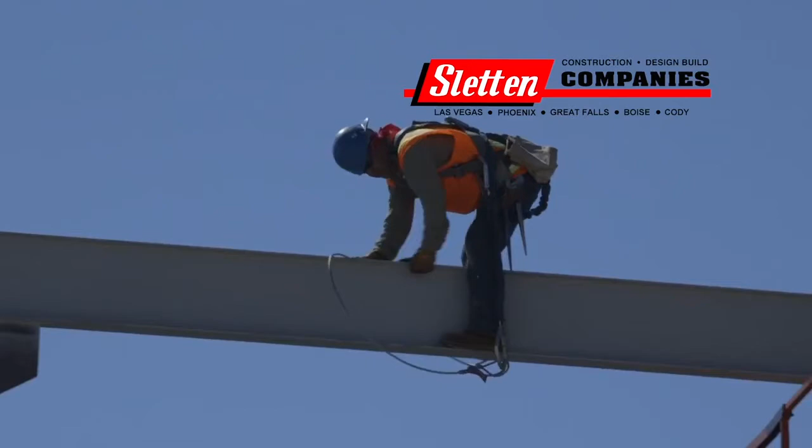It is also important that we have a constant and never wavering focus on improving safety, improving how we conduct our daily activities, eliminating risk, and improving daily safety and how we manage risk on the job. Rather than simply taking chances and ignoring unsafe conditions, we must pre-plan our work to help minimize the hazards and eliminate the risk of injury.

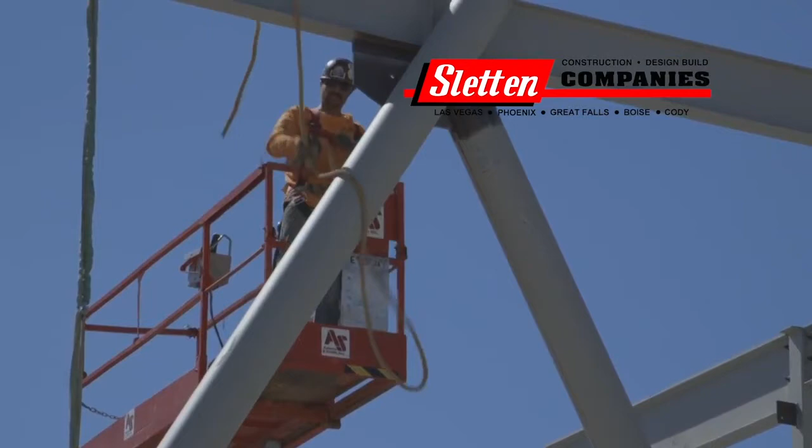Our mission statement and our company values also support this approach. Now is a particularly exciting time to join Sletten Construction. We are learning new ways to make the most of being part of a global economy in construction and its expertise and resources. And we have our own initiatives underway for transforming Sletten Construction into the engaging and dynamic company that we aspire to be, and a leader in safety in the construction industry.

We are proud of our employees and the excellent work they are doing. We are pleased and happy to welcome you to our company and look forward to your contributions to our success.

Thank you. My name is Jeremy Garness. I've been working for Sletten Construction in various areas since July 1997. I'm currently now in the Great Falls shop. I'm here to talk to you today about the decisions you make at work and how shortcuts can affect your family and your life.

On July 12, 2010, I took a shortcut at work and it left me burned on 65% of my body. They life-flighted me to Harborview Medical Center, where I spent 69 days, initially 59 in the ICU and 10 on the main floor, going through 11 different surgeries.

I was released on September 18, 2010. I went back to work part-time October 22nd, 2010, and was released to full duty on December 10th, 2010. I went through 3 other surgeries after my initial surgery, so I did a total of 14 surgeries, nearly 100 days in the hospital, and several years of rehab.

Safety goals for this project: 0 accidents, 0 injuries, and compliance with all OSHA regulations. We can accomplish this by working together as a team and not taking shortcuts.

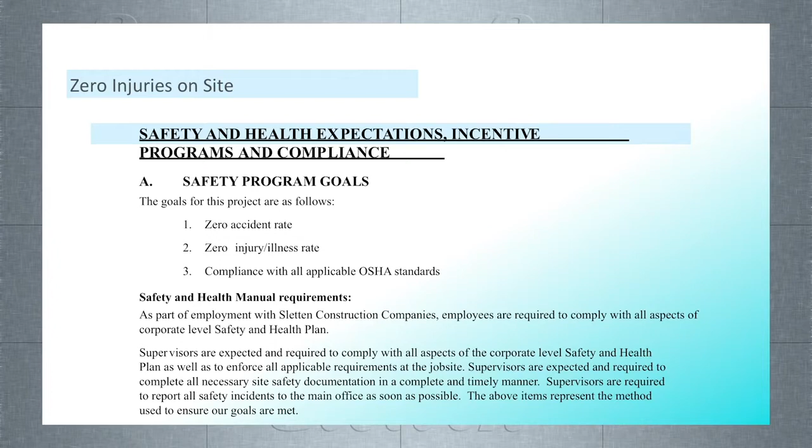What is a job hazard analysis? A job hazard analysis, also known as a JHA, and also called a Job Safety Analysis, or JSA, is a technique to identify the dangers of specific tasks in order to reduce the risk of injury to workers.

Why is a JHA important? Once you know what the hazards are, you can reduce or eliminate them before anyone gets hurt. The JHA can also be used to investigate accidents and to train workers how to do their job safely.

JHAs must be completed for all major tasks, including excavation, scaffolding, lockout-tagout, confined space, fall protection, framing, chipping, demo, concrete forming and concrete pours, and many others.

It will take a little time to do your JHAs, but it's time well spent. Be sure to involve employees in the process. They do the work and often know the best ways to work more safely.

Safety toolbox huddles are required daily and must be signed by all employees in attendance.

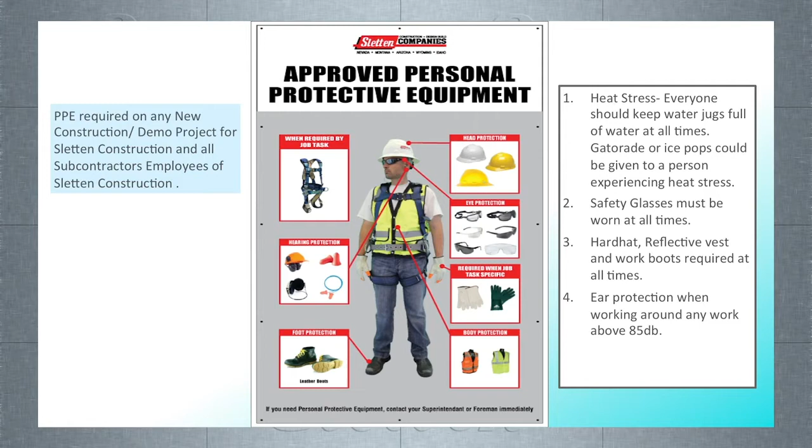PPE: The personal protection equipment required on all Sletten construction projects consists of safety glasses, reflective vest, hard hat, sleeved shirt, long pants, and boots. Hearing protection is to be worn whenever the noise level is above 85 decibels, and fall protection should be worn when working 6 feet above any level. Be sure to wear gloves when needed.

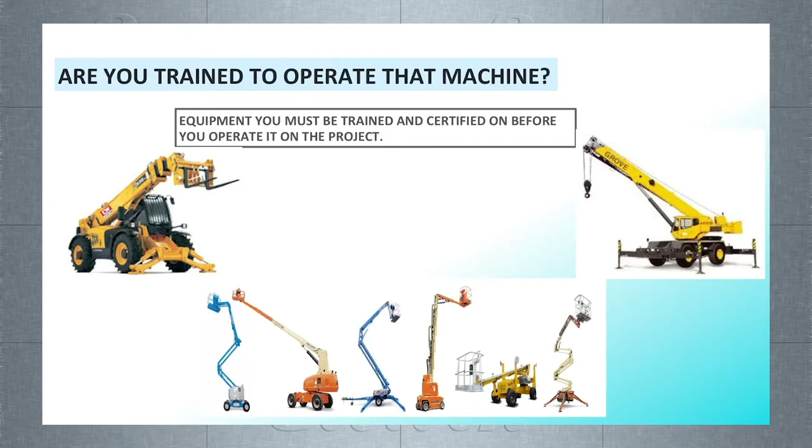Employees must be trained on equipment to be used on site, including forklifts, snorkel lifts, boom lifts, and cranes. Please make sure to have your proof of training on you at all times. All equipment being operated on site must have a daily documented inspection form available on the equipment.

Ladders: When accessing another level, the ladder must extend at least 3 feet above the landing to provide a handhold for getting on and off the ladder. The ladder must be secured at the top and the bottom. The ladder must be inspected prior to use, and if any defects are noted, the ladder must be taken out of service. When setting up an extension ladder, it should be set up at a 4-to-1 ratio.

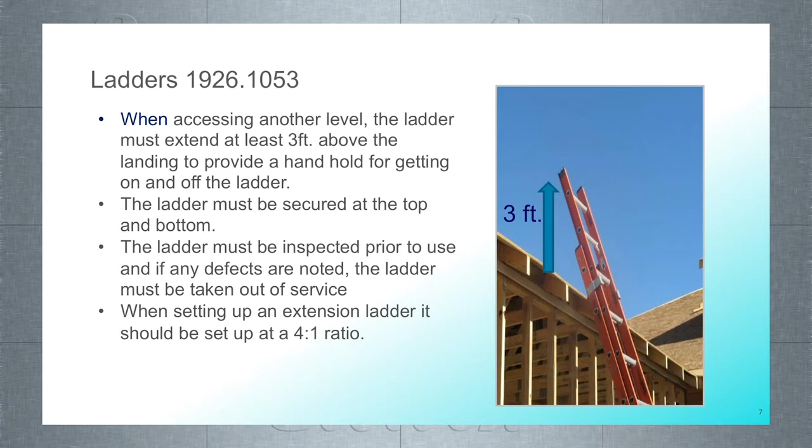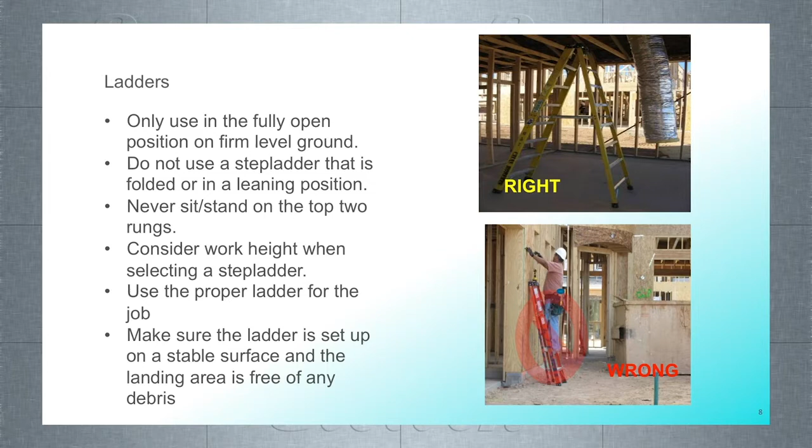Only use a ladder in the fully open position on firm, level ground. Do not use a stepladder that is folded or in a leaning position, and never sit or stand on the top 2 rungs. Consider work height when selecting a stepladder, and use the proper ladder for the job. Make sure the ladder is set up on a stable surface and the landing area is free of any debris.

Housekeeping: All work areas, walkways, stairways, access, and egress points shall be maintained to remain clean and free of debris and materials. Work areas shall be cleaned as often as necessary to eliminate trip, slip, and fall hazards. Focus areas include scaffolds, ladders, ramps, stairs, electrical and mechanical equipment.

Subcontractors are responsible for their own daily cleanup. Good housekeeping promotes a safe and productive work environment and is a critical element in the safe execution and completion of Sletten projects. Please throw your lunch away in a proper trash container. If you don't have a container, please ask for one.

Fall protection: The superintendent of each contractor on site shall oversee all aspects of the fall protection program on the job site. Every contractor on site whose employees are exposed to fall hazards shall have a competent person oversee all aspects of the fall protection PPE.

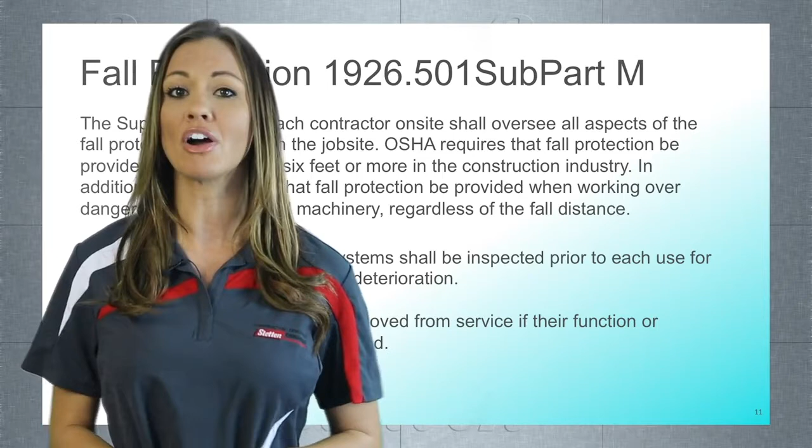OSHA requires that fall protection be provided at elevations of 6 feet or more in the construction industry. In addition, OSHA requires that fall protection be provided when working over dangerous equipment and machinery, regardless of the fall distance. Components of fall protection systems shall be inspected prior to each use for mildew, wear, damage, and other deterioration. Defective components shall be removed from service if their function or strength has been adversely affected.

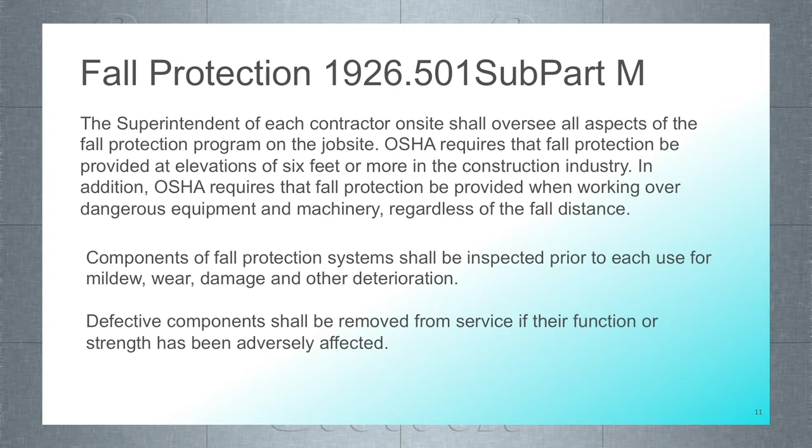Personal fall arrest systems will be mandatory for every person on this project when working at a height of 6 feet or more when no conventional fall protection is in place. A conventional fall protection system consists of a guardrail system with a top rail of 42 inches and a mid-rail of 21 inches. The guardrail system must be able to withstand a force of 200 pounds upward, inward, and outward.

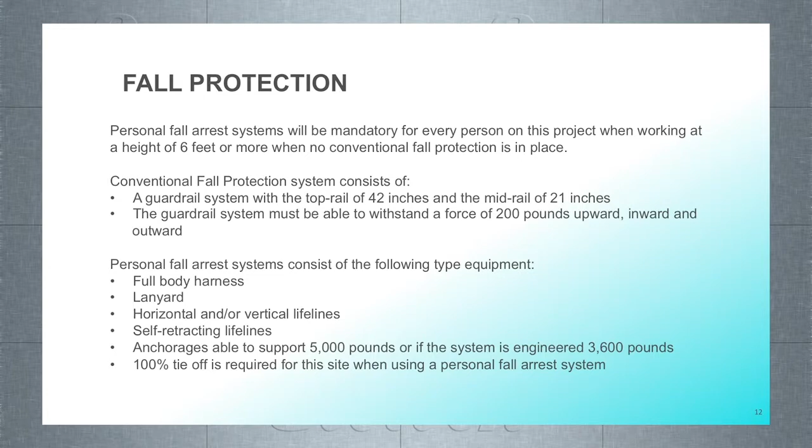Personal fall arrest systems consist of the following type of equipment: full body harness, lanyard, horizontal and/or vertical lifelines, self-retracting lifelines, anchorages able to support 5,000 pounds, or if the system is engineered, 3,600 pounds. 100% tie-off is required for the site when using a personal fall arrest system.

Each contractor on site that has employees working in an excavation shall have a designated competent person on the job site. The competent person shall be on site at all times during which excavation activities are conducted. All excavations over 5 feet deep shall be shored, sloped, or benched as required. Excavations 4 feet in depth or greater shall have a stairway, ladder, ramp, or other safe means of egress within 25 feet of any employee.

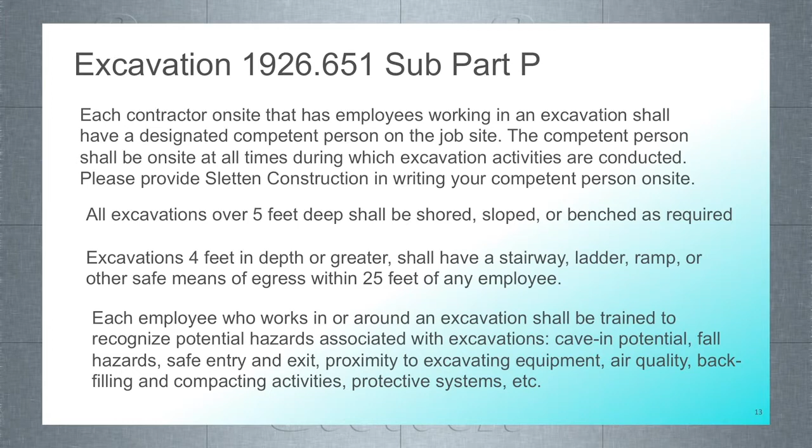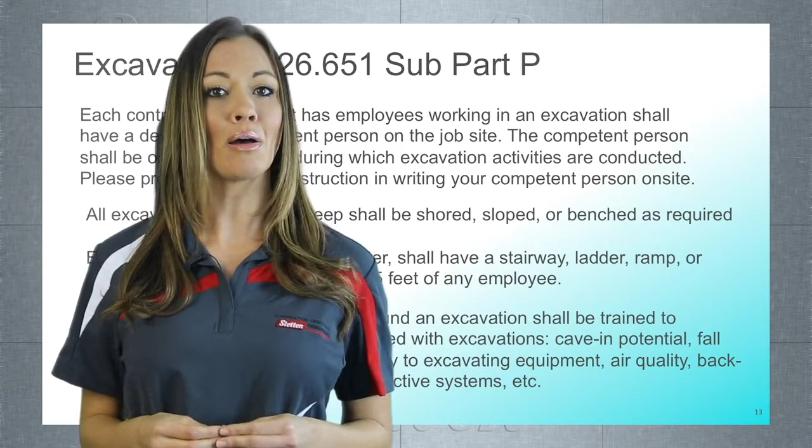Each employee who works in or around an excavation shall be trained to recognize potential hazards associated with excavations, such as cave-in potential, fall hazards, safe entry and exit, proximity to excavating equipment, air quality, backfilling and compacting activities, protective systems, etc.

What is the difference between an excavation and a trench? OSHA defines an excavation as any man-made cut, cavity, trench, or depression in the Earth's surface formed by earth removal. This can include excavations for anything from cellars to highways.

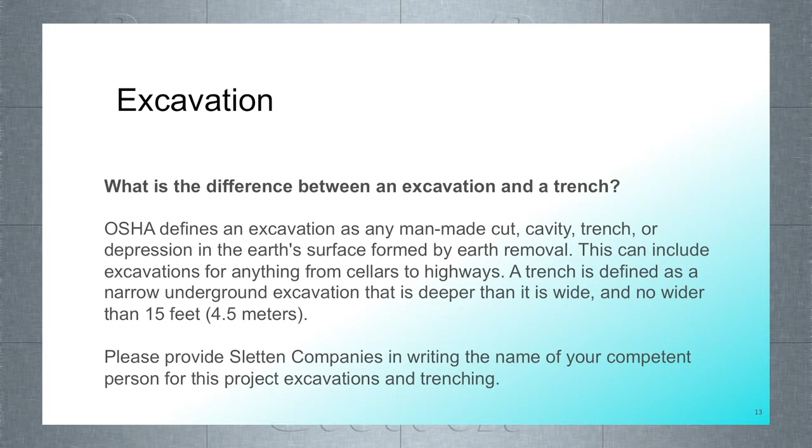A trench is defined as a narrow, underground excavation that is deeper than it is wide and no wider than 15 feet.

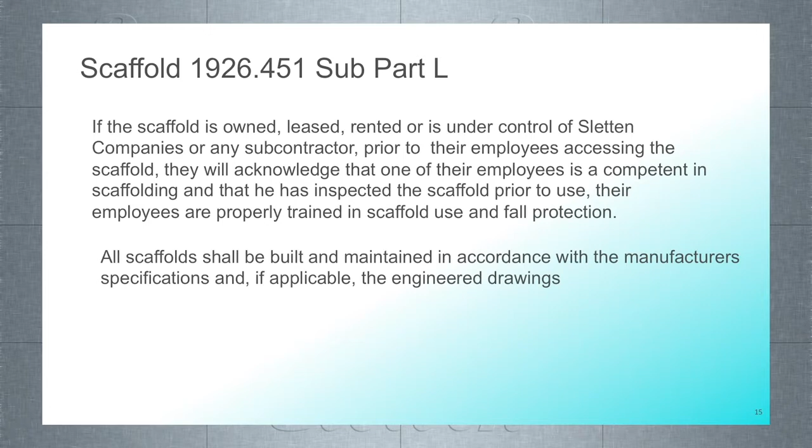Scaffolds. If the scaffold is owned, leased, rented, or under control of Sletten companies or any subcontractor, prior to their employees accessing the scaffold, they will acknowledge that one of their employees is competent in scaffolding and has inspected the scaffold prior to use, and that their employees are properly trained in scaffold use and fall protection. All scaffolds shall be built and maintained in accordance with the manufacturer's specifications and, if applicable, the engineered drawings. OSHA's scaffolding standard has several key provisions.

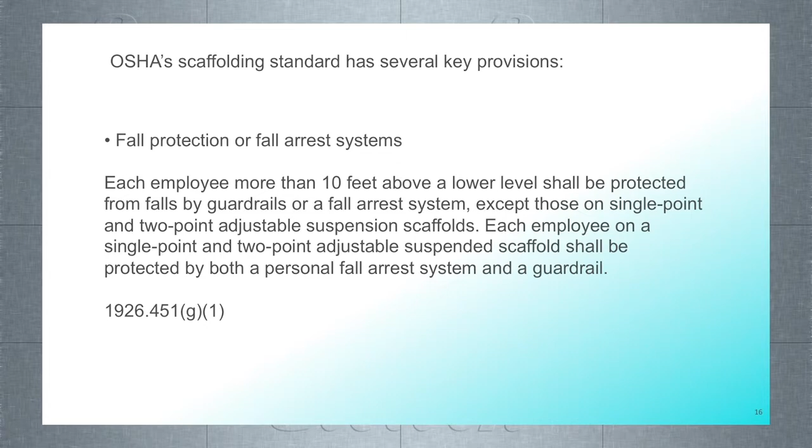Fall protection or fall arrest systems. Each employee more than 10 feet above a lower level shall be protected from falls by guardrails or a fall arrest system, except those on single-point and two-point adjustable suspension scaffolds. Each employee on a single-point and two-point adjustable suspension scaffold shall be protected by both a personal fall arrest system and a guardrail system.

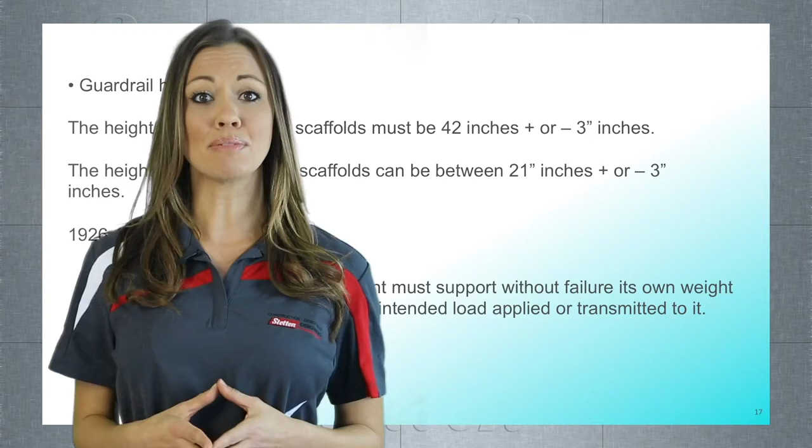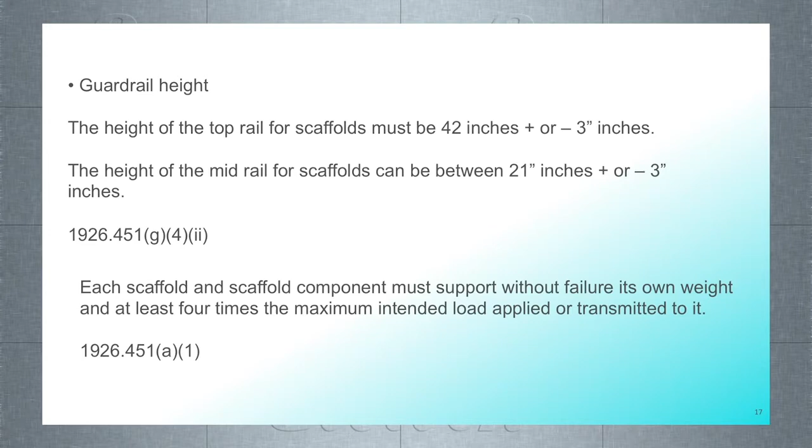Guardrail height. The height of the top rail for scaffolds is 42 inches plus or minus 3 inches. The height of the mid-rail for scaffolds can be between 21 inches plus or minus 3 inches. Each scaffold and scaffold component must support without failure its own weight and at least 4 times the maximum intended load applied or transmitted to it.

Lockout, tagout, and confined space. When a specific task being performed by any employee on the job site requires performing lockout, tagout, or confined space work, a job site JHA must be filled out by the contractor performing the work before any work starts. Each employee engaged in the work must have the proper training to perform the task safely and correctly. If you encounter either of these situations and you are not trained, you must stop work immediately.

The site shall comply with the Individual Emergency Action Plan, also known as EAP, for direction of emergency transportation. Please see each site's individual plan for evacuation. In the event of a medical emergency requiring medical response, immediately call 911 or the site's designated emergency response number and clearly give your name, location, and the nature of the incident. Stay on the line until the operator releases you.

Working above water. Employees working over or near water shall be provided with a U.S. Coast Guard approved life jacket or buoyant work vest when the danger of drowning exists. If the deck of a bridge or a work platform is not equipped with an OSHA compliant railing system, or if 100% fall protection is not provided, employees walking or working on the deck must wear a U.S. Coast Guard approved life jacket or buoyant work vest, also called a life preserver or personal flotation device, a PFD.

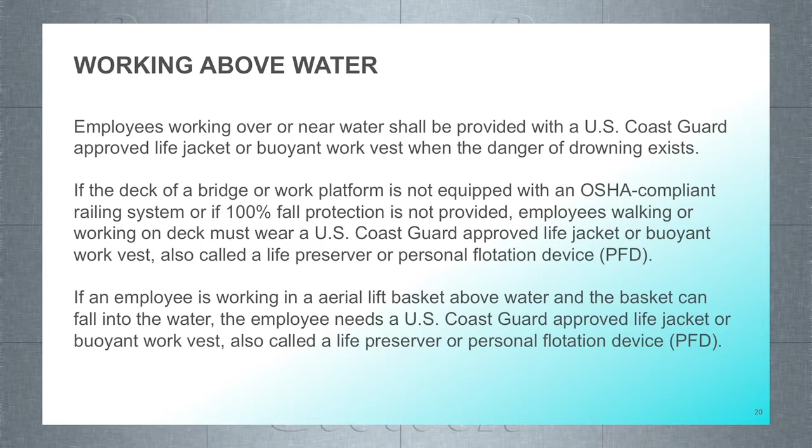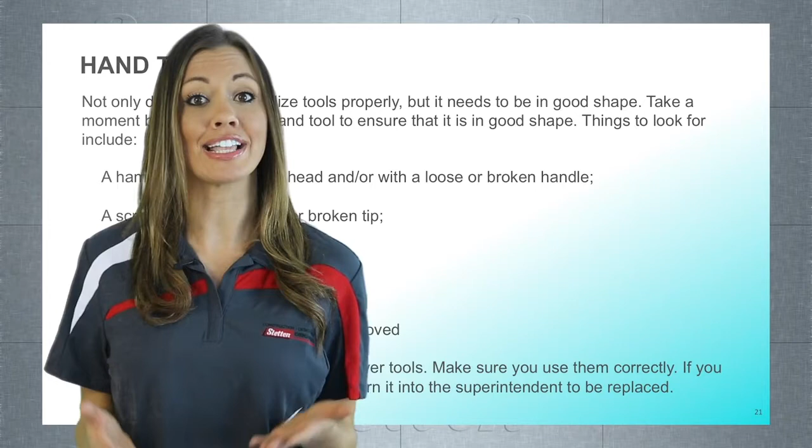Hand tools. Not only do you need to utilize hand tools properly, but the tool needs to be in good shape. Take a moment before using any hand tool to ensure that it is in good shape. Things to look for include a hammer with a chipped head and/or a loose or broken handle, a screwdriver with a worn or broken tip, any cutting tool with a dull surface, chisels with a mushroomed head, and tools that have had their temper removed.

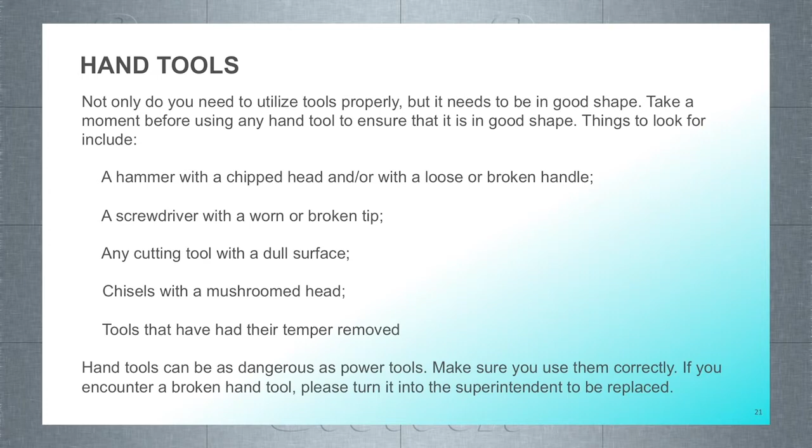Hand tools can be as dangerous as power tools. Make sure you use them correctly. If you encounter a broken hand tool, please turn it in to the superintendent to be replaced.

Focus on safety. Preventing the top 4 construction fatalities: 1. Fall hazards. 2. Electrical hazards. 3. Struck-by hazards. And 4. Caught-in-between hazards.

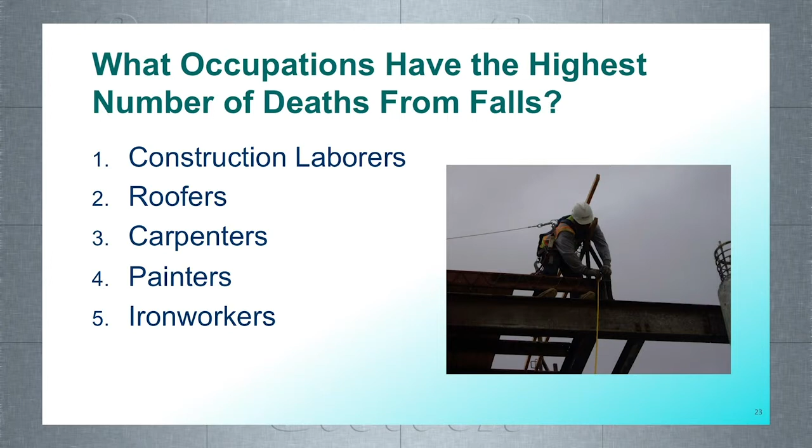What occupations have the highest number of deaths from falls? Construction laborers, roofers, carpenters, painters, and iron workers. Falls are number 1 - the leading cause of construction fatalities, accounting for 35% of construction deaths nationwide.

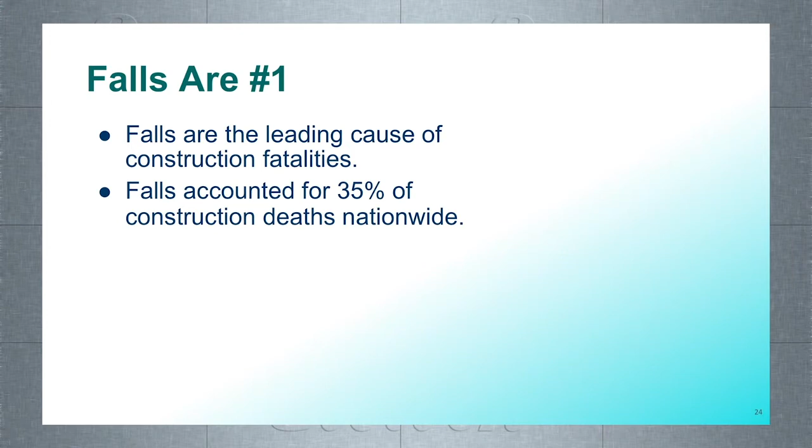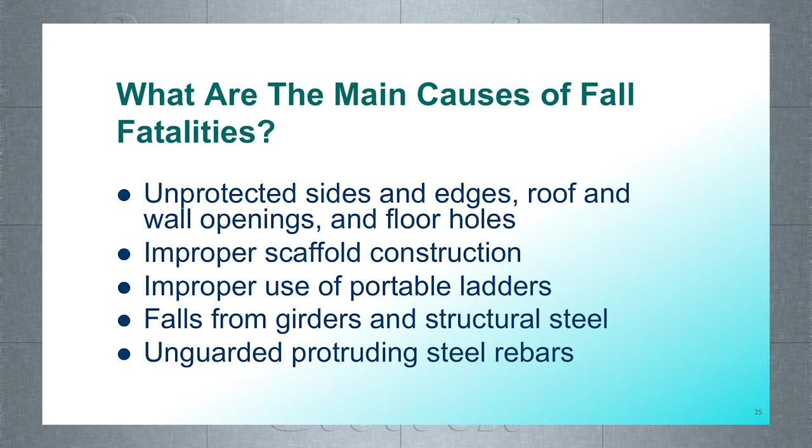Electrical hazards are number 2. Electrocutions are the second leading cause of construction fatalities, accounting for 10% of construction deaths nationwide in 2010. Workers can even be killed by ordinary household current.

What are the main causes of electrical injuries? Contact with overhead power lines, contact with live circuits, poorly maintained power cords, and improper use of power tools.

How can you work around overhead power lines safely? Locate overhead lines before starting the job. Keep equipment at least 10 feet away. Assume that the power lines are energized. De-energize and ground the lines when working nearby. Use wood or fiberglass ladders near power lines, still keeping at least 10 feet away.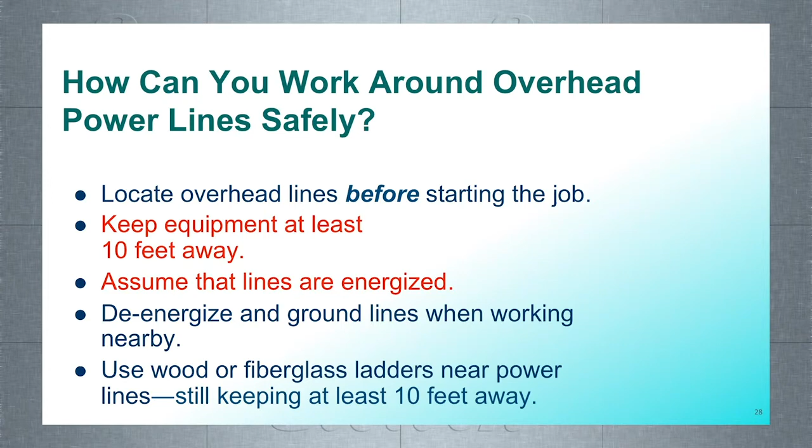Struck-by hazards are the second leading cause of construction fatalities, accounting for 8% of construction deaths nationwide. Approximately 75% of struck-by fatalities involve heavy equipment. One in four struck-by-vehicle deaths involve construction workers, more than any other occupation.

What are the main causes of struck-by deaths? Vehicle and roadway hazards, falling objects, and flying objects.

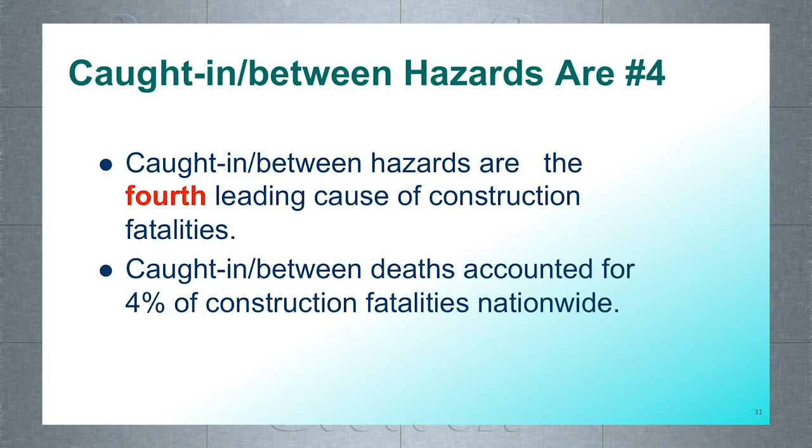Caught-in-between hazards are the fourth leading cause of construction fatalities, accounting for 4% of construction fatalities nationwide.

What are the main causes of caught-in-between deaths? Being crushed by collapsing materials, such as in a trench or excavation, and being caught in between machinery and equipment.

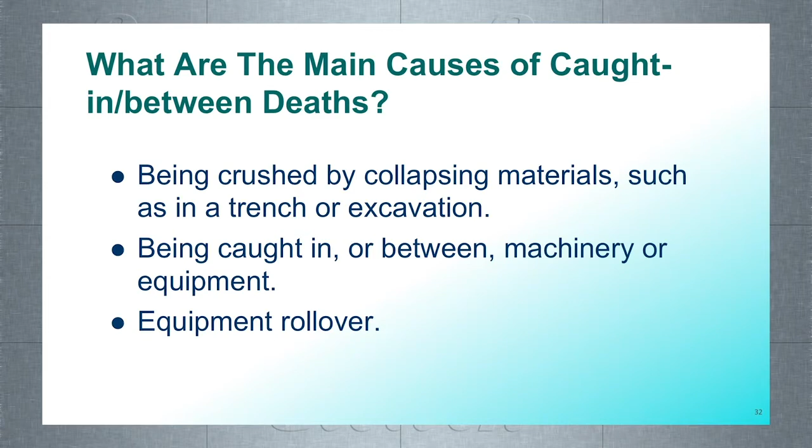Equipment rollover. Stop work. Who has the authority? Stop work authority: stand up for safety. Do it safely or not at all. Who has stop work authority?

What are the hazards? What workers are involved? Are you trained? Will you stop unsafe work? Is there a contingency plan? These are questions that you should ask yourself.

Historically, Sletten Construction has always supported the philosophy of stand up for safety, stop the job, and/or stop work authority. Ensuring personnel feel empowered, we will continue our stop-the-job focus and embed this message with all of our employees. Stand up for safety.

What are the hazards? Are they flammable? Are they falls, or gases, corrosives, or electricity? Are the hazards cave-ins or harmful dust, etc.?

Who are the right people involved? Do all the workers know the job? Are all equipment and tools in proper working order? Have you had the proper training? Are you trained on the specific equipment and/or tools required? How long has it been since you were trained?

What can we do differently? If in doubt, stop the job. Plan ahead for the task. Develop a job hazard analysis and, where required, personal protective equipment.

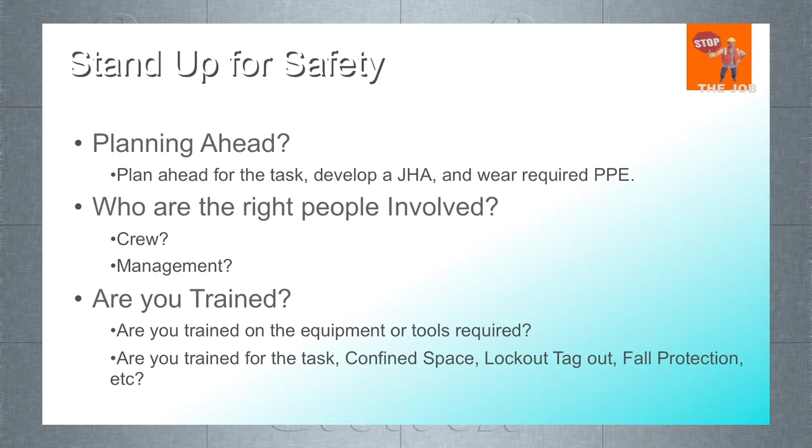Who are the right people involved? Is this the right crew? Do we have the correct management for the job? Are you trained for the specific task? Are you trained on the equipment or tools required, such as confined space, lockout/tagout, or fall protection?

Questions to ask: Will you stop unsafe work? Are you sure it is safe to begin work? What surrounding work may impact your safety? Did something unforeseen happen after starting the job? Do you have a contingency plan?

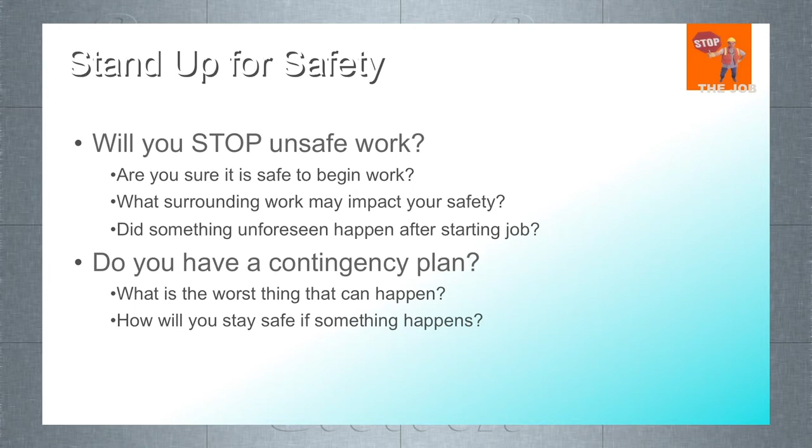What is the worst thing that can happen? How will you stay safe if something happens? You have the authority and obligation to stop the job until you are satisfied it is safe to proceed.

Global harmonization: new label elements and safety data sheets, or SDS. Label format. Description of pictograms: the health hazard pictogram.

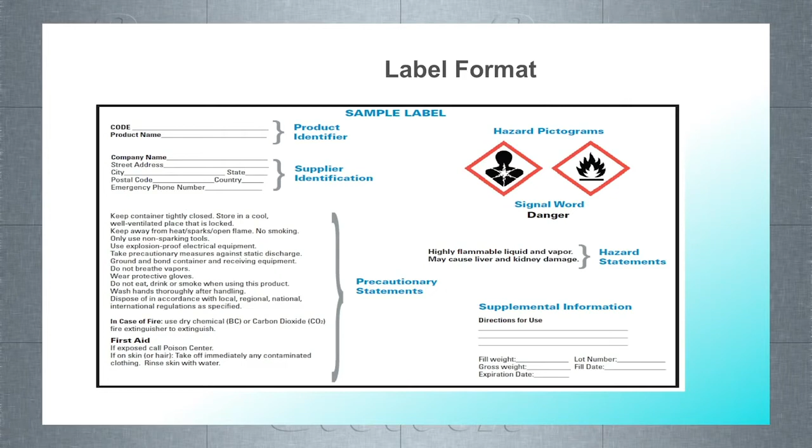Health hazard chemicals pose a risk to your health if used improperly. The skull and crossbones pictogram will usually be used in combination with a health hazard pictogram to signify particularly hazardous chemicals, such as chemicals with acute toxicity—fatal or toxic—which produce adverse effects following a single dose of the substance.

The exclamation mark pictogram will usually be used in combination with a health hazard pictogram to signify particular health risks, which are less severe than the skull and crossbones category.

The flame pictogram indicates there is a fire risk, and you should be especially concerned about ignition sources and combustible materials. Chemicals labeled with a flame-over-circle pictogram can create an increased fire risk in your work or storage environment.

Oxidizers are chemicals that produce additional oxygen in an environment, which may cause or contribute to the combustion of other materials.

Corrosion pictogram. The corrosion label should prompt you to be especially aware of PPE and storage requirements. Exploding bomb pictogram. Chemicals marked with an exploding bomb pose a significant physical risk and should be treated with extreme caution. The gas cylinder pictogram is used to identify compressed, liquefied, and dissolved gases. Understand the hazards of high pressures and how to use and store cylinders. The environment pictogram is a non-mandatory category for safety training because it is regulated by other agencies, but it is included here for your information.

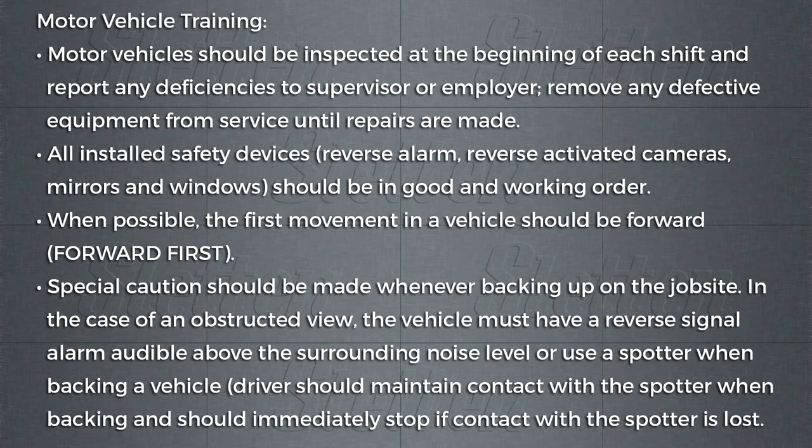Worker on-foot training. Be aware of equipment travel paths and avoid standing or walking in these areas. Be aware of vehicle blind areas and avoid being near these areas. Listen for reverse signal alarms in the area. Stay vigilant.

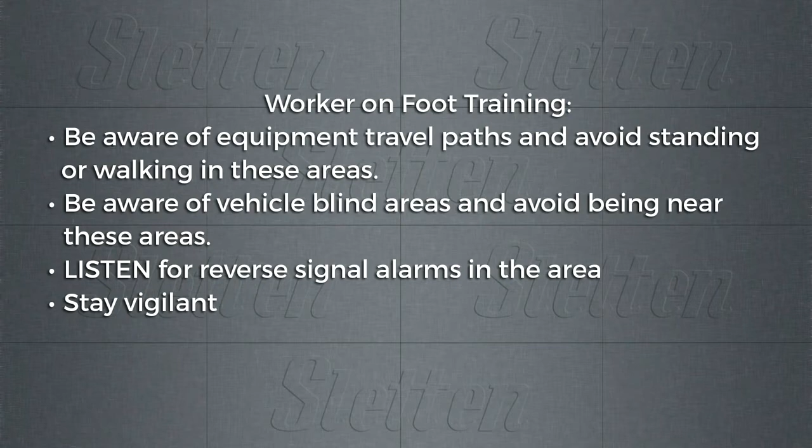Section 15, Regulatory Information, identifies the safety, health, and environmental regulations specific for the product that is not indicated anywhere else on the safety data sheet. Section 16, Other Information, includes the date of preparation or last revision.

Site emergency reporting, an emergency action plan, and accident, incident, near-miss reporting procedures are as follows. In the event of an emergency, contact 911 or the job site's designated emergency reporting number. The assembly point for a site evacuation is to be discussed on a site-by-site basis during this orientation. Evacuation maps will be posted on the job site. Employees should know where to assemble in the event of a job site evacuation. Do not leave the assembly point until you have been accounted for by your company and your supervisor has given that information to a Sletten representative.

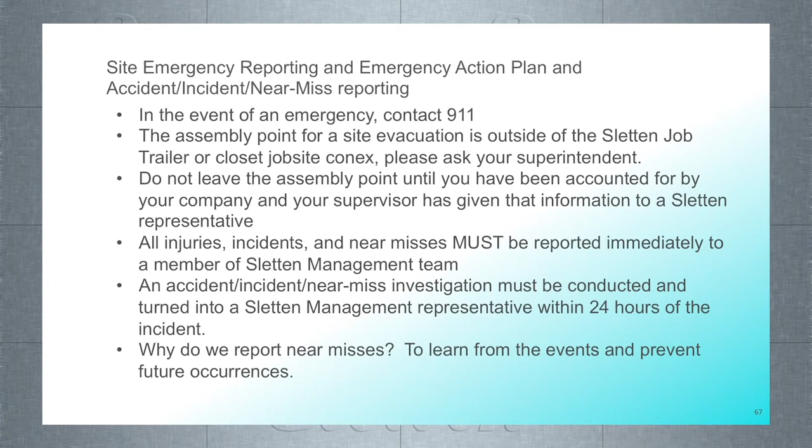All injuries, incidents, and near misses must be reported immediately to a member of Sletten management team, regardless of how insignificant the incident may seem. An accident, incident, or near-miss investigation must be conducted by the affected subcontractor and turned into a Sletten management representative within 24 hours of the incident. Why do we report near misses? To learn from the events and prevent future occurrences. There is statistical data that suggests for every 300 near misses, there will be one catastrophic event. We want to examine near-miss incidents and prevent the near-miss incident from ever becoming a catastrophic event. This is what an example of an evacuation map should look like.

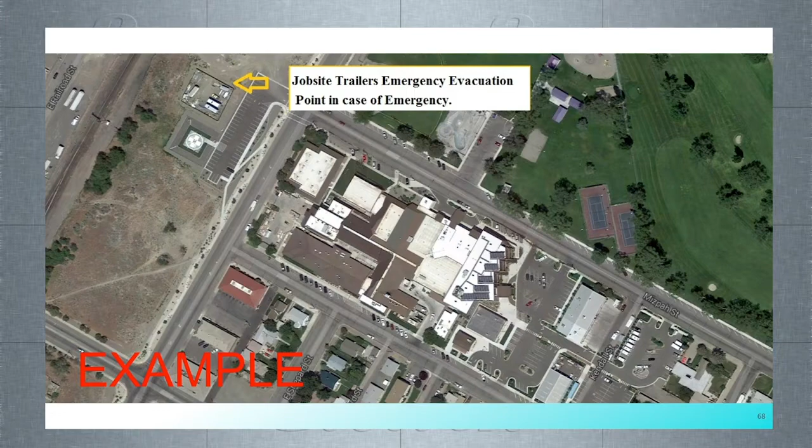Fire prevention and protection plans. A fire extinguisher rated not less than 2A shall be provided for each 3,000 square feet of the protected building area or major fraction thereof. Travel distance from any point of the protected area to the nearest fire extinguisher shall not exceed 100 feet. All firefighting equipment provided by the employer shall be conspicuously located and have the applicable monthly and annual inspections.

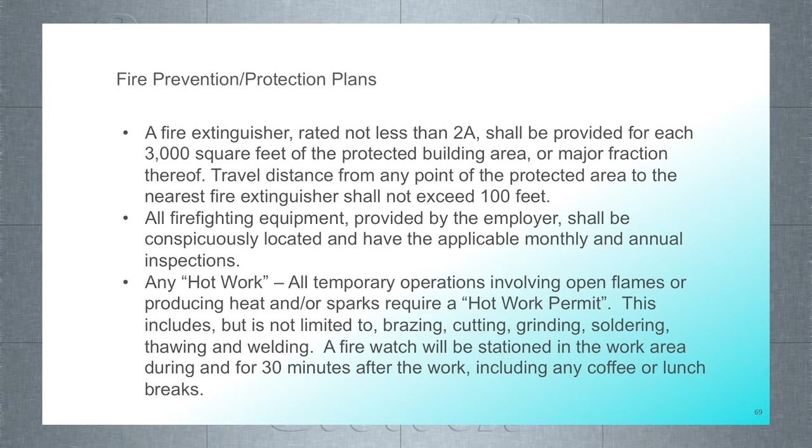Any hot work, which means all temporary operations involving open flames or producing heat and/or sparks, requires a hot work permit. This includes, but is not limited to, brazing, cutting, grinding, soldering, thawing, and welding. A designated fire watch will be stationed in the work area during and for 30 minutes after the work, including any coffee or lunch breaks. The designated fire watch cannot have any other duties other than fire watch and will be trained in hazard recognition and have the authority to stop the work as necessary.

Let's understand that a fire extinguisher is meant for a fire in the incipient stage, meaning beginning. Small stage, a trash can size fire. Let's understand the different types of fire extinguishers. The most common type of fire extinguisher is the ABC type, which covers Type A, Type B, and Type C fires. But let's go ahead and look at the individual types.

Type A fire extinguishers are intended for ordinary combustibles such as wood, paper, cloth, and most plastics. Your building or home is considered an ordinary combustible. Type B fire extinguishers are intended for flammable liquids such as oils, gasoline, and solvents, etc. Type C fire extinguishers are intended for energized electrical fires.

Type D fire extinguishers are intended for specialized metals such as magnesium, titanium, aluminum, sodium, and potassium. Type K, just remember, it is for the kitchen. Cooking fires with animal or vegetable oils.

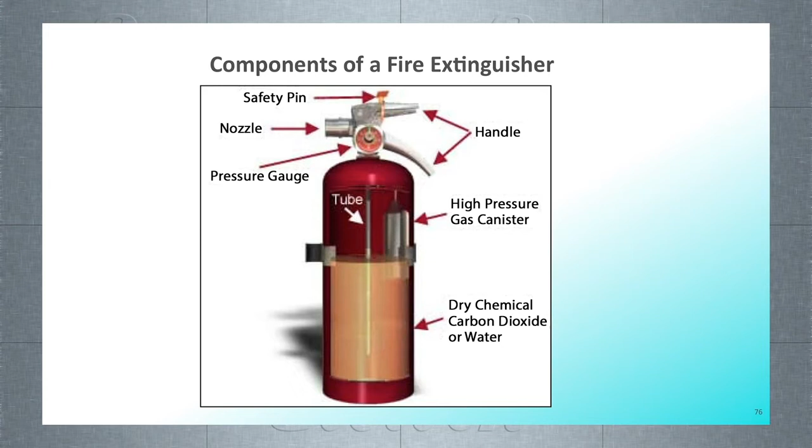Let's discuss the components of a fire extinguisher. The safety pin, which must be secured in place. The nozzle. The pressure gauge. The extinguisher needs to be fully charged and the gauge needs to be in the green. The handle. The high-pressure gas canister. Make sure there is no visible damage. The canister contents can be dry chemical, carbon dioxide, or water. When inspecting it, make sure there are no cracks and the handle is not broken.

How to use a fire extinguisher. Use the PASS system. P. Pull the pin. A. Aim the nozzle at the base of the flames. S. Squeeze the handle. S. Sweep from side to side.

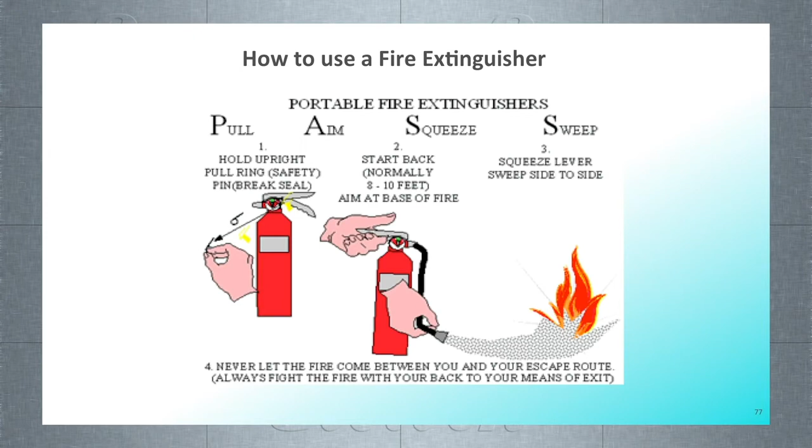Annual inspections must be conducted by a licensed fire extinguisher maintenance company. The annual inspection tag must reflect the date of inspection. The recorded inspection date must be within the last calendar year.

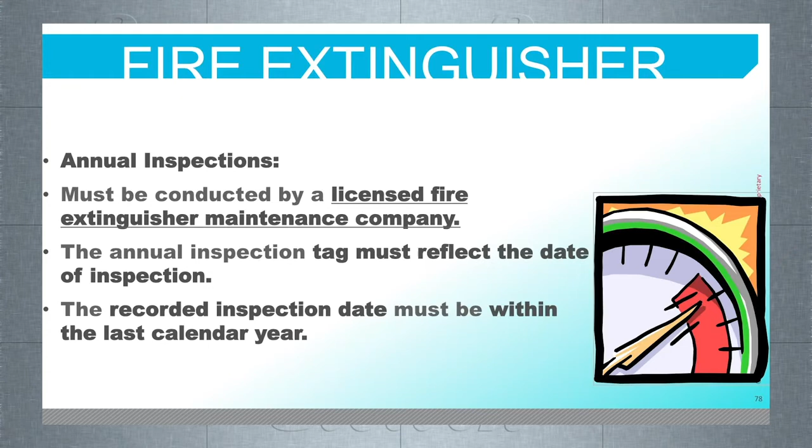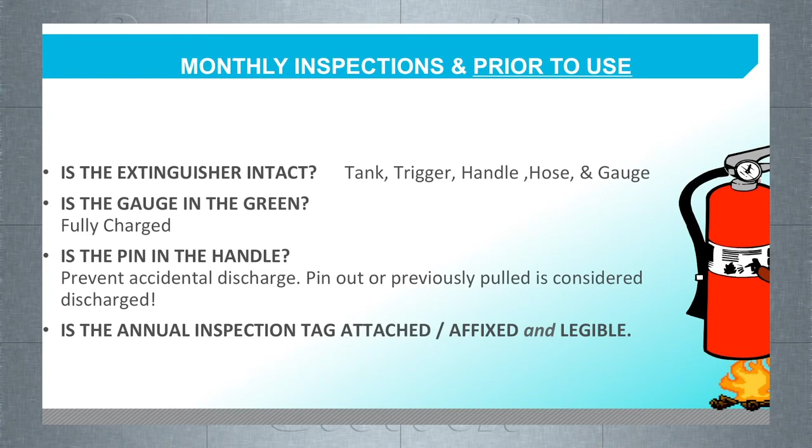Monthly inspections and prior to use inspections. Is the extinguisher intact? Tank, trigger, handle, hose, gauge. Is the gauge in the green? Fully charged. Is the pin in the handle and secured? This is to prevent accidental discharge. If the pin is out or previously pulled, it is considered discharged. Is the annual inspection tag attached or affixed and legible?

Fire prevention. Keep work areas clear and free of debris. No smoking or open flames around flammable liquids. Use only approved safety gas cans. Do not block doors, aisles, ladders, or stairs. Do not tamper with fire equipment.

Fire rules. The final rule is to always position yourself with an exit or means of escape at your back before you attempt to use an extinguisher to put out a fire. In case the extinguisher malfunctions or something unexpected happens, you need to be able to get out quickly, and you don't want to become trapped. Just remember, always keep an exit at your back.

Crystalline silica awareness training. What is silica? Silica is one of the most common naturally occurring elements on the planet. Silica, the mineral compound silicon dioxide, is found in two forms, crystalline and non-crystalline, also referred to as amorphous. Sand and quartz are common examples of crystalline silica.

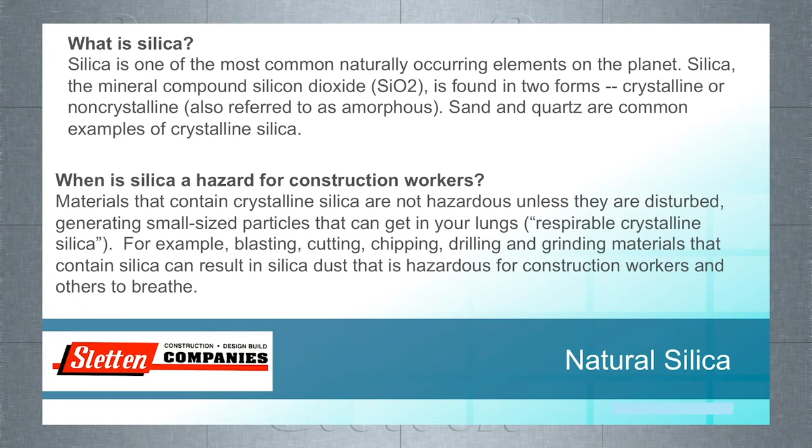When is silica a hazard for construction workers? Materials that contain crystalline silica are not hazardous unless they are disturbed, generating small-sized particles that can get into your lungs. Respirable crystalline silica. For example, blasting, cutting, chipping, drilling, and grinding materials that contain silica can result in silica dust that is hazardous for construction workers and others to breathe.

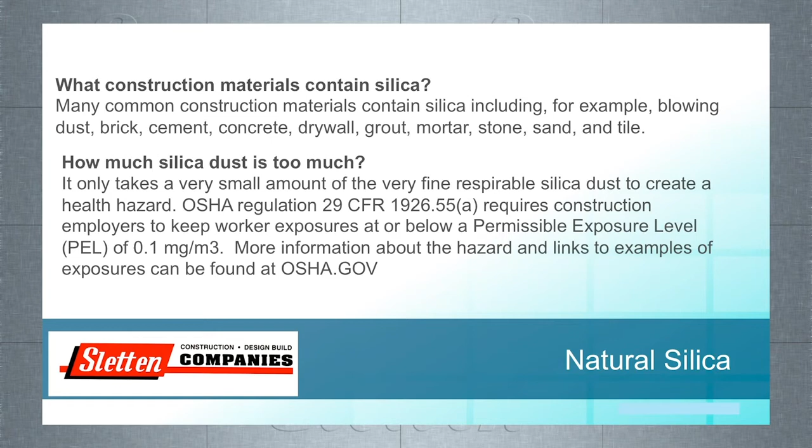What construction materials contain silica? Many common construction materials contain silica, including, for example, blowing dust, brick, cement, concrete, drywall, grout, mortar, stone, sand, and tile. How much silica dust is too much? It only takes a very small amount of the very fine respirable silica dust to create a health hazard.

OSHA Regulation 29 CFR 1926.55(a) requires construction employers to keep worker exposures at or below a permissible exposure level of 0.1. More information about the hazard and links to examples of exposures can be found at OSHA.gov.

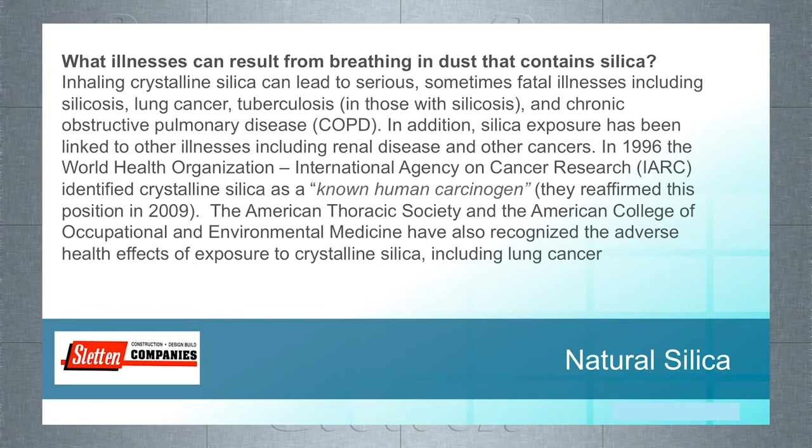In 1996, the World Health Organization, International Agency on Cancer Research, identified crystalline silica as a known human carcinogen. They reaffirmed this position in 2009. The American Thoracic Society and the American College of Occupational and Environmental Medicine have also recognized the adverse health effects of exposure to crystalline silica, including lung cancer.

The easiest way to ensure you are adequately protecting your workers from silica dust exposure and complying with OSHA's new rule is to follow Table 1. Table 1 outlines 18 tasks commonly associated with respirable silica dust exposure.

For each task in Table 1, there are engineering controls or work practices to implement to prevent exceeding the permissible exposure limit, PEL, to respirable crystalline silica. In addition to the engineering controls and work practices, Table 1 also details what, if any, respiratory protection is required.

Under the new rule, employers are required to create a written exposure control plan and make it available to all employees. The written plan should contain the following: description of all tasks that involve exposure to respirable crystalline silica, details on the engineering control methods, work practices, and respiratory protection required for each task to limit exposure, housekeeping practices to be used to limit exposure, methods used to restrict access to work areas to limit the number of employees from being exposed to silica dust.

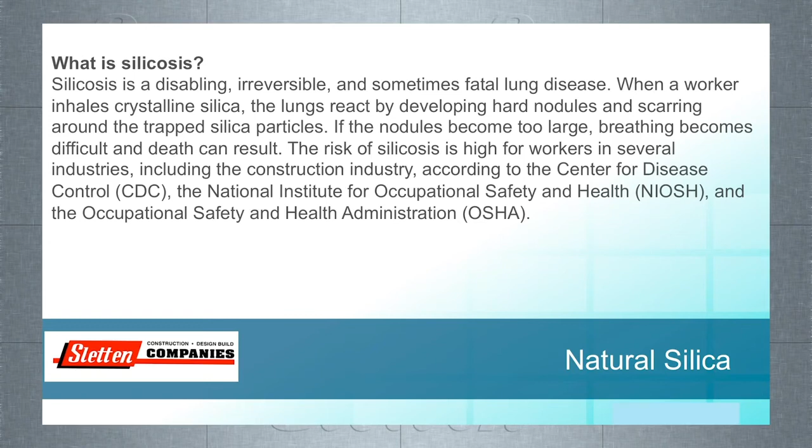What is silicosis? Silicosis is a disabling, irreversible, and sometimes fatal lung disease. When a worker inhales crystalline silica, the lungs react by developing hard nodules and scarring around the trapped silica particles. If the nodules become too large, breathing becomes difficult and death can result. The risk of silicosis is high for workers in several industries, including the construction industry, according to the Center for Disease Control, the National Institute for Occupational Safety and Health, and the Occupational Safety and Health Administration.

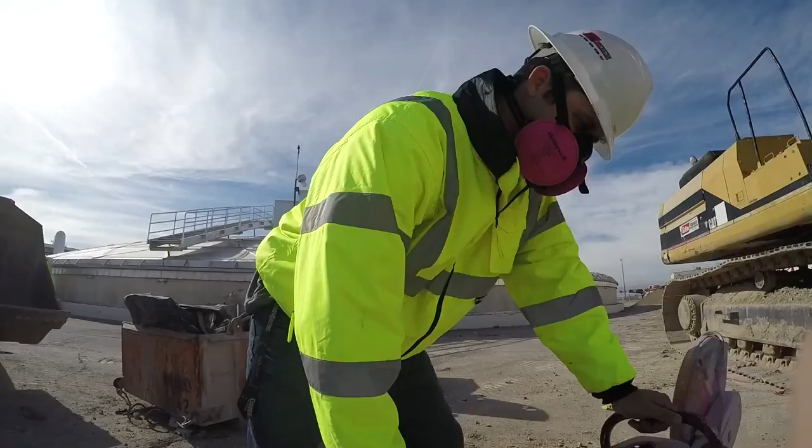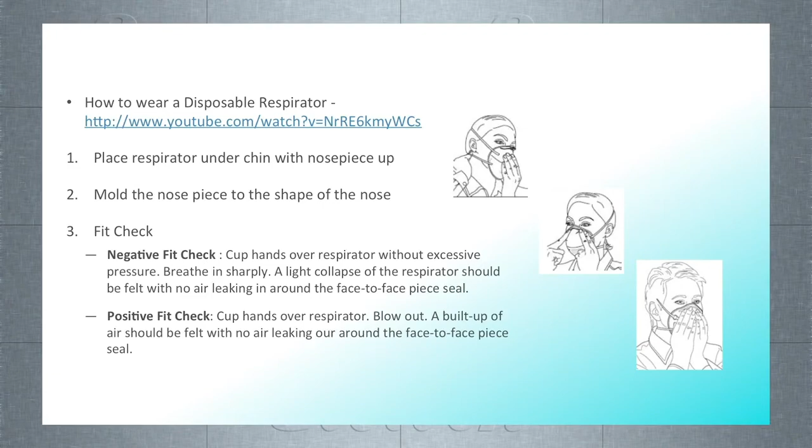How to wear a disposable respirator. Place the respirator under chin with nose piece up. Mold the nose piece to the shape of the nose. Fit check. Negative fit check. Cup hands over respirator without excessive pressure. Breathe in sharply. A light collapse of the respirator should be felt with no air leaking in around the face-to-face piece seal. Positive fit check. Cup hands over respirator. Blow out. A buildup of air should be felt with no air leaking around the face-to-face piece seal.

How should I avoid bringing dust home on my clothes? The National Institute for Occupational Safety recommends that workers avoid bringing silica dust home from work by changing into disposable or washable work clothes on the work site, showering, if possible, and changing into clean clothes before leaving the work site to prevent contamination of other work areas, cars, and homes. Parking your car where it will not be contaminated with silica. When applicable, where there are high concentrated levels of silica present, there will be an option of disposable overalls available.

Where can I find out about silica-related rules and regulations? OSHA is the primary source for information on regulations that cover silica exposures and measures employers are required to take to protect their employees. To learn more, go to OSHA Silica-Related Standards for Construction.

Here at Sletten Construction, we strictly adhere to the procedures put in place during this COVID pandemic. Social distancing is a must on construction sites. The following practices promote social distancing and prevent the spread of germs and viruses. Please try to avoid handshakes or close conversation when not wearing a mask. Toolbox gatherings should be less than 15 people. Otherwise, break into smaller groups. Always keep a 6-foot distance between employees. This includes lunch areas during lunch and break periods. Please wear a mask if you need to work within a 6-foot distance and when required to travel in job site buggies with more than two employees.

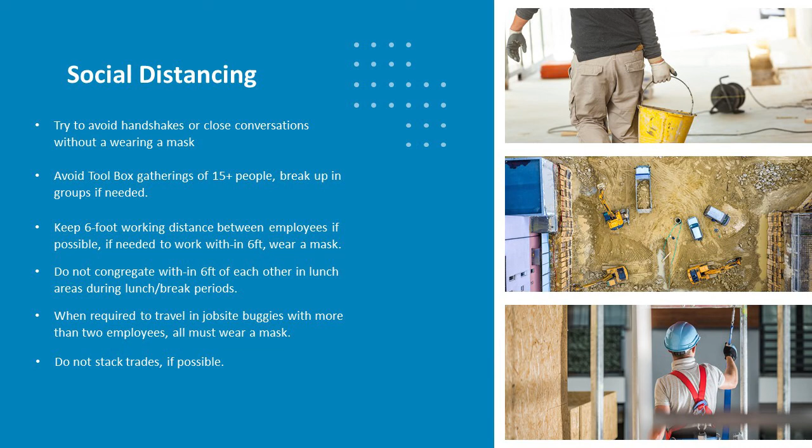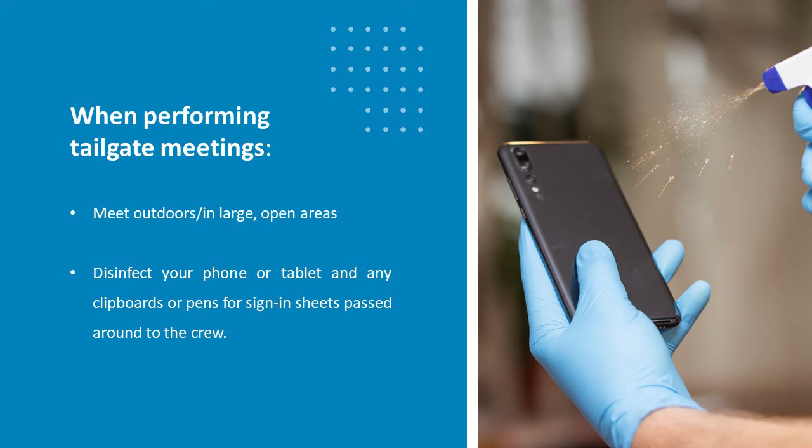If possible, do not stack trades. When performing tailgate meetings, you must meet outdoors or in large open areas. You must also disinfect your phone or tablet, clipboards, and pens for sign-in sheets that have been passed around to the crew. On the job site, it is important to keep the restroom sanitized daily, cleaned and emptied weekly, or more if needed. Please keep all site locations clean and sanitized for daily trash such as paper, hand towels, food containers, etc. You must also instruct workers to wash hands after using the restroom and before and after breaks and lunches.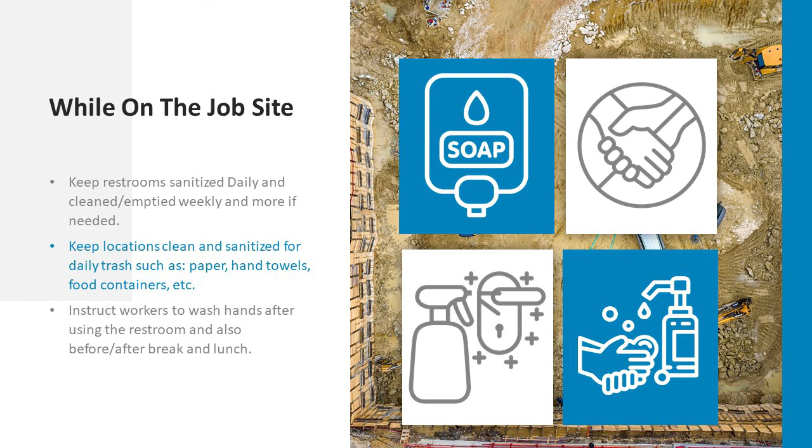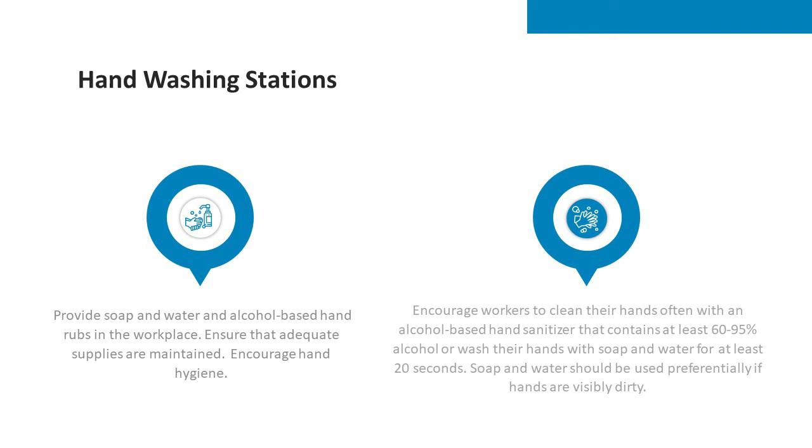Hand washing stations should be provided with soap and water in the workplace. Ensure that adequate supplies are maintained. Encourage hand hygiene. Workers need to clean their hands often with an alcohol-based hand sanitizer that contains at least 60 to 95% alcohol, or wash their hands with soap and water for at least 20 seconds. Soap and water should be used if hands are visibly dirty. We strongly encourage employees, subcontractors, and vendors to bring their own personal protection equipment and should not share tools, water bottles, hand towels, or food and lunches.

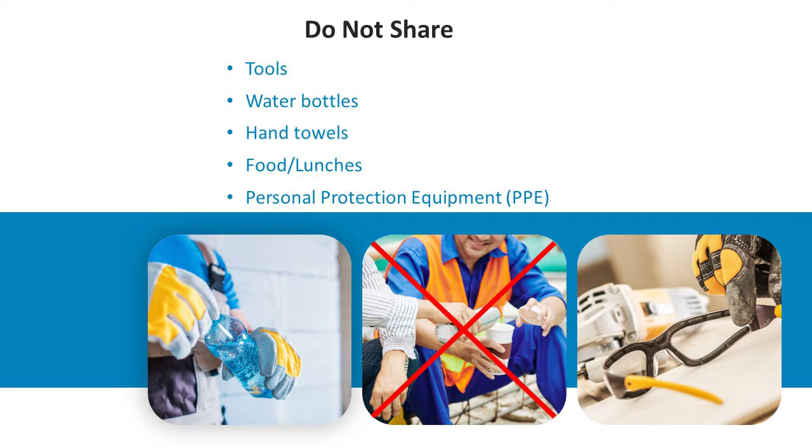Together, we can help stop the spread. Stay safe and please wear a mask. If you have any questions, please ask the project superintendent.